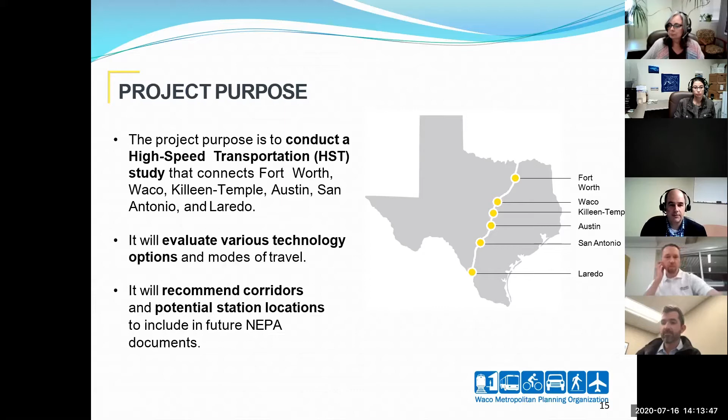Just as a reminder, this study was intended to begin where the Texas-Oklahoma passenger rail study left off. If you remember, that study looked at several different service options along a corridor roughly paralleling I-35 from Oklahoma City all the way down to Laredo and into northern Mexico. This study focused on just a handful of things. One was technology, adding Hyperloop as an option for consideration since that is new since the TOPRS study was completed. We also wanted to look at conceptual alignments and refine that a bit from what the TOPRS study looked at, and then look at a very high level at potential station locations within each of our MPO areas.

So on slide 16, one of the most important things that came out of this study was a determination that all 6 MPO areas are viable station locations for any potential high-speed transportation option. For us, that's particularly comforting because, as you can see from this slide, we are the smallest of the 6 MPO areas along the corridor.

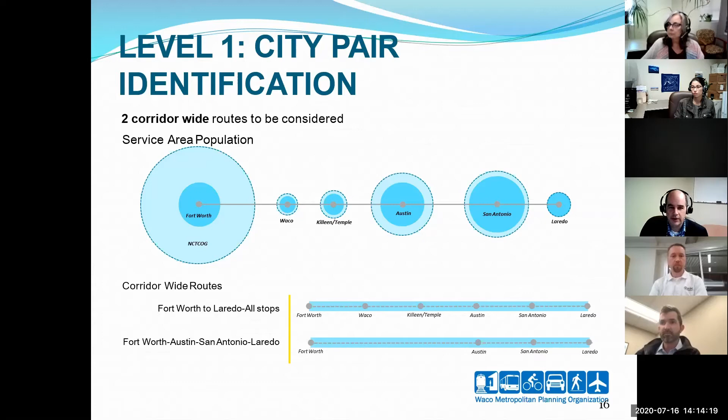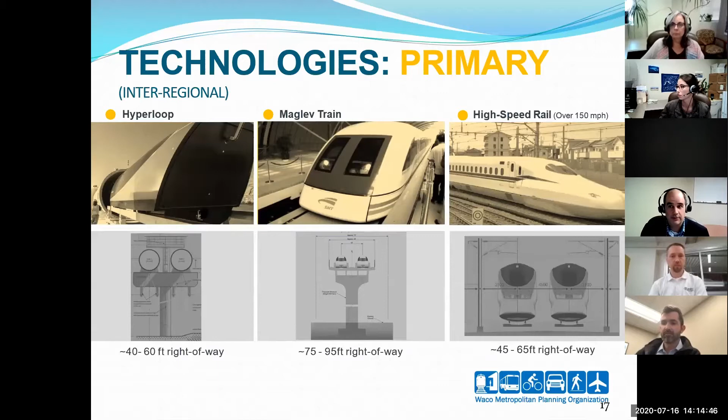When we get to slide 17, the consulting team really focused on 3 primary technologies for this corridor: Hyperloop, which I've just mentioned, maglev, and high-speed rail. I'll go over a little bit about what each of those entail and what some of the advantages and potential disadvantages are for each.

When we talk about high-speed rail, we're talking about a traditional steel wheel on steel rail train, but it's really trying to maximize the speed benefits of that technology. There are some significant limitations. 200 miles an hour is probably about the maximum, with a typical operating speed closer to 150 miles an hour. The big advantage is it's proven technology, in operation in countries all throughout the world, so we know very well what those engineering, operational, and construction costs are.

When we get to maglev, we're a little bit more futuristic. Maglev is short for magnetic levitation, usually over a center beam. You have magnets in both the train and the track, and the magnets within the track are turned on and off to propel the train down the track. The big advantage is that the train essentially floats on magnetic current, eliminating any drag or resistance from steel wheels, so you can go much faster than traditional high-speed rail—usually about 350 miles an hour topping out, with typical operating speeds around 250 miles an hour.

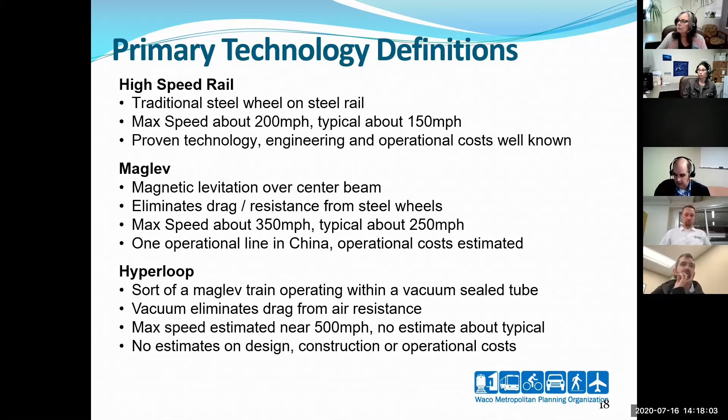Now, the consultants did look at 3 other infill options, just a very cursory review. These are probably more appropriate as a second phase to basically provide service to the areas in between the main stations—so something like service to Hillsboro, West, or Lorena, perhaps. But that's probably still maybe another decade or so beyond development of the primary corridor.

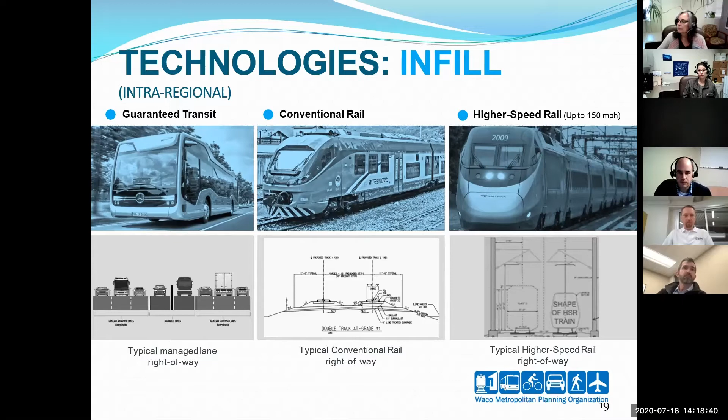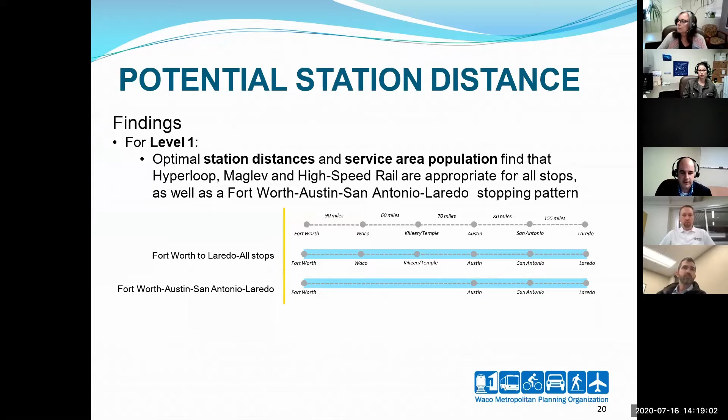So on slide 20, the main takeaway at this particular analysis is that not only is service to Waco viable, but all service options are also viable to all stations or all MPO areas. So that's another important recommendation out of this study.

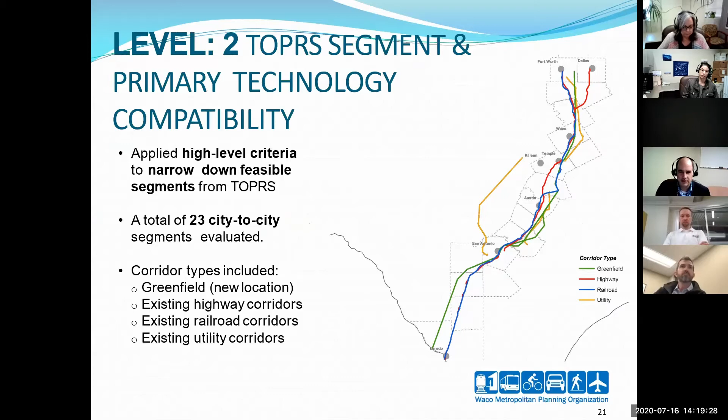So the next part was potential alignments, and this is still a very high-level conceptual overview, basically just trying to identify whether it was appropriate to follow existing corridors—highways, railroads, or utilities—or whether a greenfield alignment was going to be necessary. In general, when this was presented to you back in November, the feeling was that greenfield alignments or utility alignments were probably what we're going to have to follow for the most part for each of the different service options.

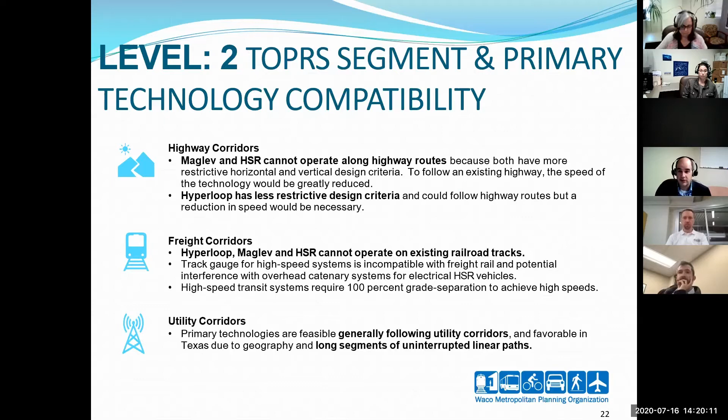That has changed, and the consulting team has made a change for the alignment between Temple and Fort Worth from, I believe, mostly a utility alignment to following Interstate 35. And we have some concerns about that, and we're going to cover what our concerns about that change are in just a second here.

We suspect the change was made to reduce potential right-of-way costs, but also to reduce the political capital necessary in a greenfield alignment scenario. So no surprise, because of the potential difference in travel speeds, the Hyperloop options came out as the highest scoring within the study, while maglev and high-speed rail scored significantly less.

Now the third part of this was to look at potential station locations. It's not going to identify a dot on the map, but basically looking at census tract areas, which can be fairly sizable. The consultants were looking at connectivity to other modes of transportation, what activity centers you might have within that area, any significant environmental constraints, and whether the land use within those areas was compatible with a high-speed operation.

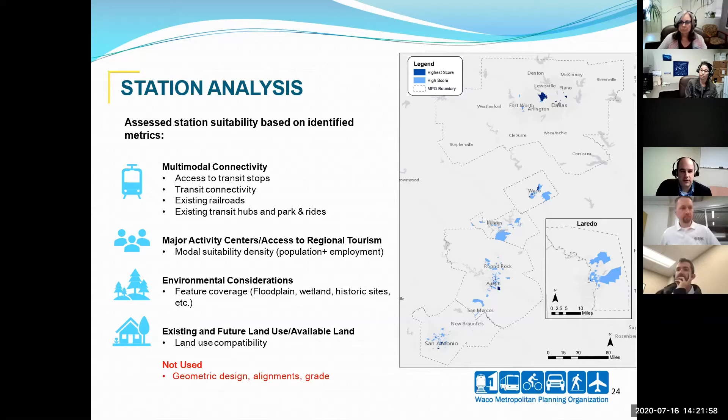When we go to the next slide, slide 25, the center map is the Waco area. You'll see that some of the high-scoring areas are actually out towards West Waco or the Hewitt-Woodway area, which I think would be extremely challenging to get a service line operating at 150 or 250 miles an hour into those particular areas.

But one of the other areas is the Belmead to Lacy Lakeview area, and specifically the Potts interchange area, which we've already identified through another corridor study of ours, the Business 77 corridor study, as a real opportunity for redevelopment in that area.

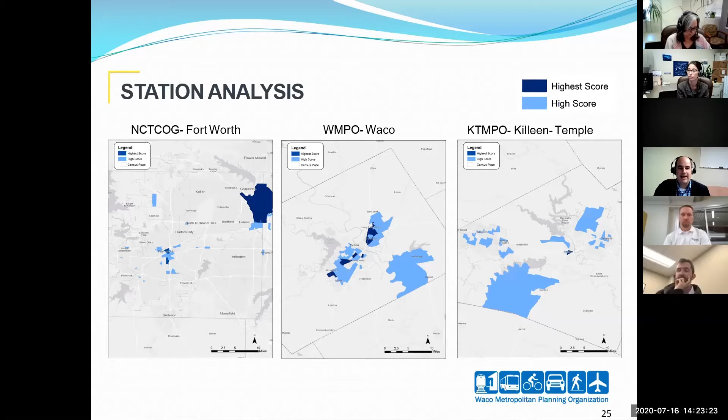The Bus Rapid Transit study has identified that as a potential station location for that service. So this may be a real opportunity for us to have a true intermodal connection and have plenty of right-of-way space to work with in that area. Of course, we're going to have a lot more study about whether that's actually feasible, and whether you can get a high-speed line into that area without wiping out half of Waco, which obviously we want to avoid.

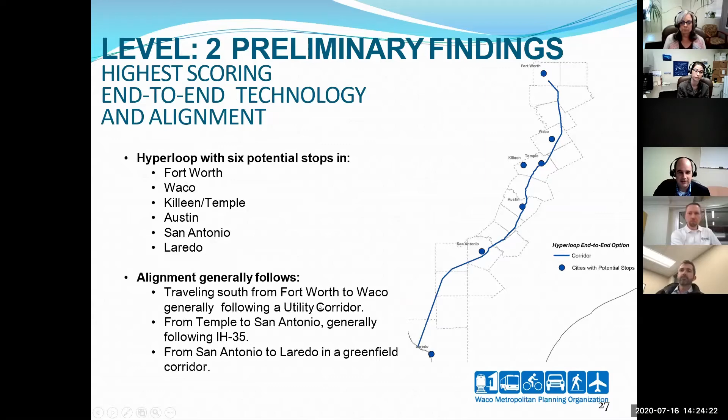And so slide 27, the findings that the consultants came up with is basically 6 stops, 1 in each MPO area, and Hyperloop is their recommended service option. As far as alignments are concerned, back in November it was Fort Worth to Waco following a utility corridor; that's now changed to Interstate 35.

So let's talk about some of our comments that we submitted to the consulting team. This is slide 28. Our first concern is that I-35 alignment. The suggestion was that Hyperloop could still follow that alignment and still travel at fairly robust speeds, whereas the other technologies would not be able to do that, most specifically maglev.

Since our understanding is that Hyperloop is essentially a maglev train in a tube, we're questioning whether that's really a valid assumption. Of course, we don't have a lot of details about Hyperloop design or its limitations. If it turns out that an I-35 alignment would require significantly reduced speeds, then our concern is that we're missing the potential benefits of that technology, which is the faster travel speeds. Or we're now having to look at a greenfield alignment, which would have a very significant right-of-way cost and political capital cost, to the point where it could perhaps change that technology recommendation.

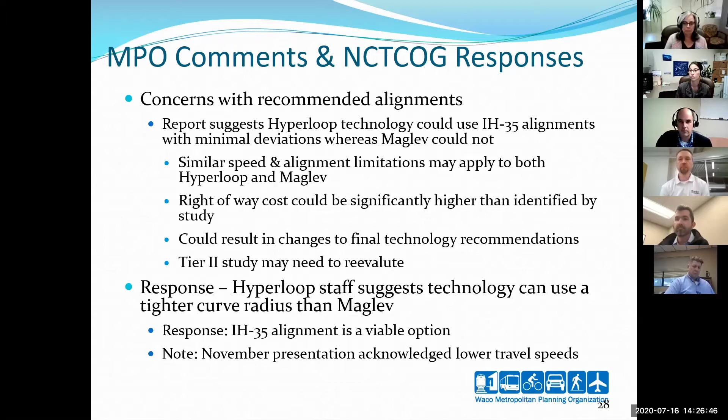The next concern we have was regarding their station analysis. We've already mentioned that their focus was on the land use question and whether things were compatible with a high-speed train station within particular census tracts. But some of what they identified as high scoring areas would be very challenging to bring a high-speed system in.

So we think this is another area where a lot more study is probably going to be necessary when we start looking at the Tier 2 study, which would be the next step.

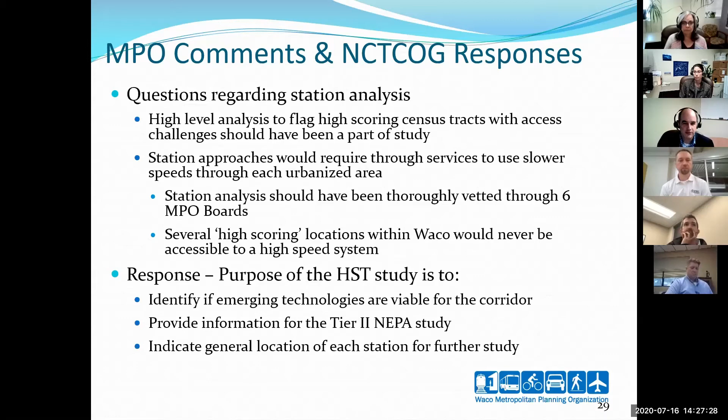So there's some policy and technical considerations we think we need to start having a conversation with the board on. The first is that, in our opinion, any technology above 150 miles an hour provides significant benefit to our region. It's a service option we don't currently have, and what we need to decide is what are we most comfortable with?

Are we more comfortable with a proven technology where we have known costs, which would be high-speed rail? Or are we willing to accept a little bit more risk with more cutting-edge technologies like maglev and Hyperloop? The risk there is that the costs may be significantly greater than perhaps what we were originally thinking, and the alignments may have to be a lot straighter, thus having a much higher taking component and requiring a much greater amount of political capital than we were thinking of initially.

We think Hyperloop does appear to be viable. There is a test track under development in Dubai, and the United Arab Emirates are putting in a considerable amount of their own resources to develop this. We think if it weren't viable, they probably wouldn't be looking at that kind of investment.

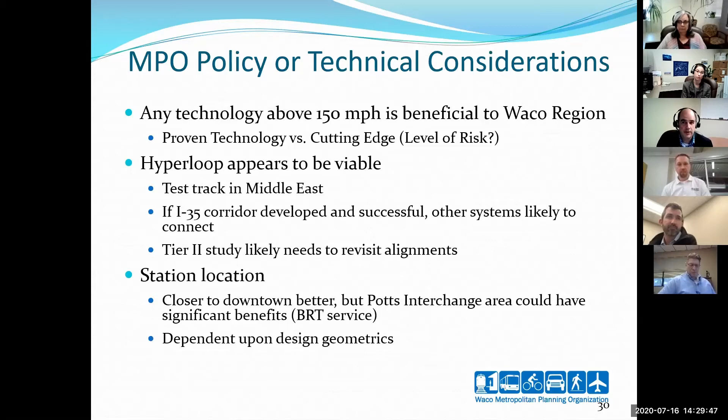So what's next? The study has been submitted by the Dallas-Fort Worth MPO, which is the North Central Texas Council of Governments. They have submitted this to the TxDOT Rail Division. The question now is, what is TxDOT's interest in continuing this study, and do they have the resources to conduct a Tier 2 environmental study?

My feeling is that they're probably waiting to see what happens with the Dallas to Houston high-speed rail line, which is making progress, but it's incremental progress, and probably is still another 4 to 6 years away from operation.

There may be private sector interest in a Hyperloop operation along I-35. The Hyperloop folks several years ago issued a report where the I-35 corridor was one of the top 20 corridors they were interested in, and it was for a number of reasons.

Market analysis should be fairly easy to construct, and there weren't a lot of environmental constraints. So this may be something where we just need to get the ball across a certain goal line, and then perhaps the private sector might be able to take this up from there.

Of course, we don't know how COVID has changed interest in this particular system. We know that right now there's not a lot of interest by the public to get onto planes, trains, buses. My guess is that once we get a handle on this disease and are able to protect ourselves against it, probably shortly thereafter, folks' memories will be short and we'll go back to some of these other transportation options. Maybe wishful thinking on my part. I'm hoping it isn't, but that's something we're going to have to track.

All right, can you hear me? Yes sir. All right, we'll start with 84. The contractor's working in the intersection, starting signal work today. I hope to have permanent signals up and activated by the end of the week. I should just have a little bit of intersection and frontage road work to wrap up. We hope to be done late this month, or worst case by end of August, and out of that Speegleville project.

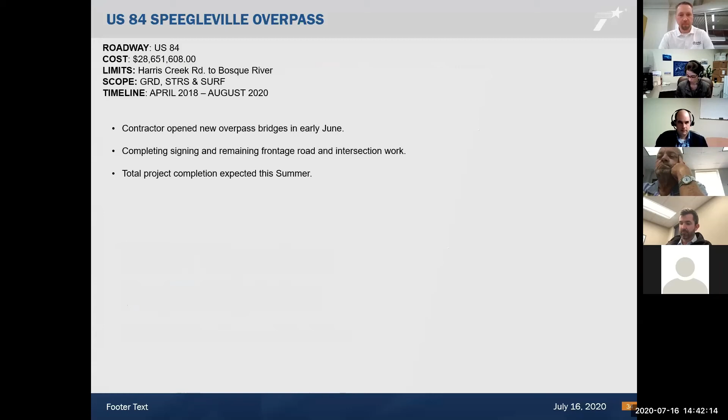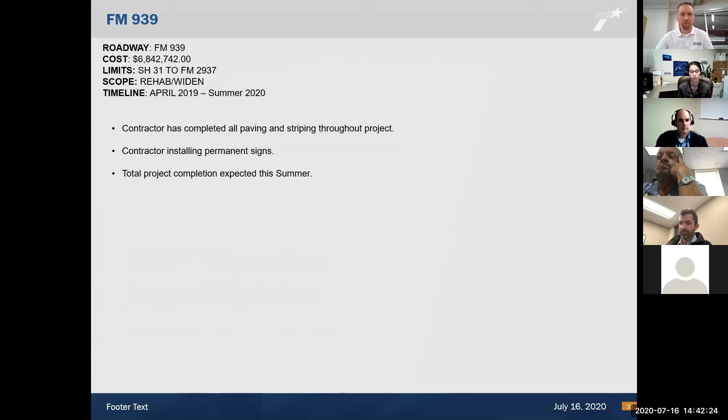939, again we're in the closeout stages, installing permanent signs, punch lists. Hope to have it wrapped up by the end of August as well. 938 at Tonk Creek, bridge is constructed, we are building the new roadway approaches on either end. Again, this is another one we hope to have wrapped up this month, August timeframe.

1637 phase 2, again another one in punch list phase, so we hope to be out of there by end of July or August timeframe as well. 1637 phase 3 is really starting to progress. Contractor is going to be starting paving on the north end of the project next week. We'll continue working in towards China Spring, and we hope to be done in the fall.

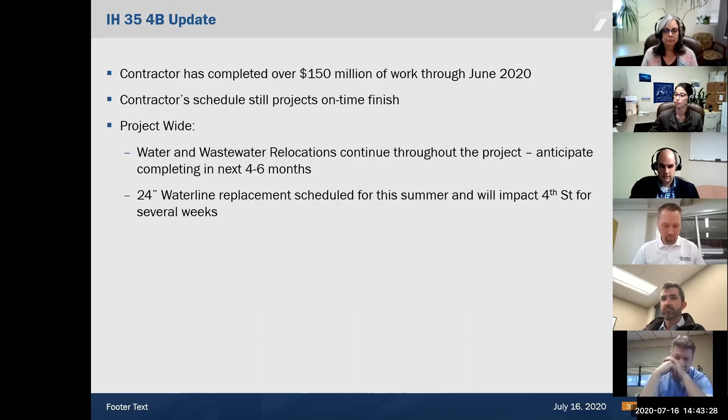So 35, we've completed just over $150 million worth of work through June. We're still projecting an on-time finish. Today, I'm actually going to do something a little different, so Chris, I'm going to take over.

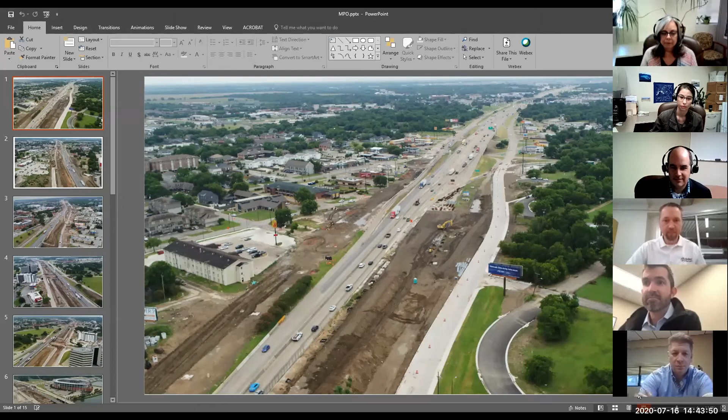We had a drone come fly the project in June. I'm just going to walk through progress and where we're going.

This first picture is the south end of the project. You can see the frontage road's complete. We're working the southbound main lanes. The northbound frontage road side, we should start paving hopefully the beginning of August, starting down around the 17th, 18th Street area and then working our way north.

You can see the new 4th, 5th Street bridges at the top of the picture. We've completed the beam setting there and hope to have that deck poured later in August. In the same stretch, you see where we've started the southbound main lane excavation and embankment work. Over on the northbound frontage road side, we're hopeful that in the August timeframe paving continues up towards 4th, 5th Street.

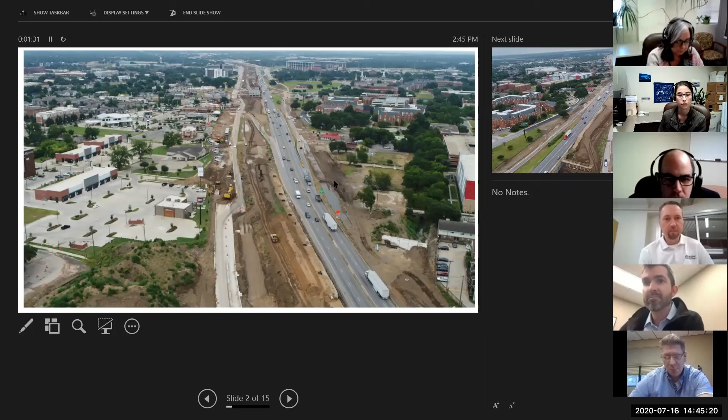This is from 4th, 5th Street, looking back to the south, an opposite view of what we just discussed. Again, you can see that one remaining section of the southbound frontage road to be completed. At the top of the picture is the new 11th, 12th Street overpass, which we hope to have poured in the August timeframe as well. On the left side of your screen, you can see the newly completed and newly opened Dutton Avenue.

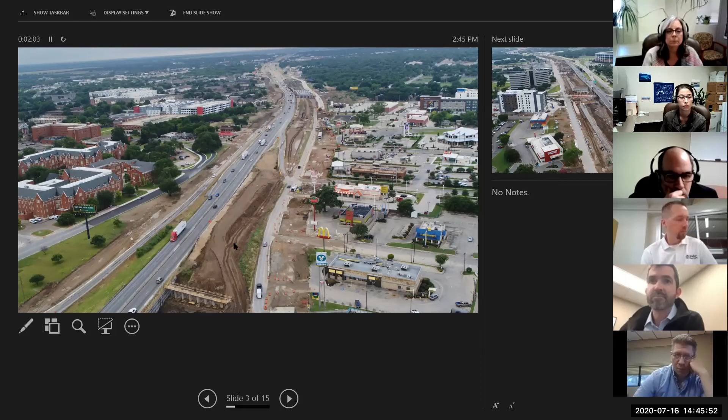This next picture is from 4th, 5th Street looking to the north. You can see the retaining wall work that started for the southbound main lanes. This bridge structure is the University Park structure, and there are now beams on that structure as well. We hope to have that bridge deck poured in August along with 4th, 5th and 11th, 12th. On the right side of your screen, you can see the little section of northbound frontage road and the right turn lane onto University Parks. That's another section we hope to have paved and opened in August, which should help the operation of that intersection.

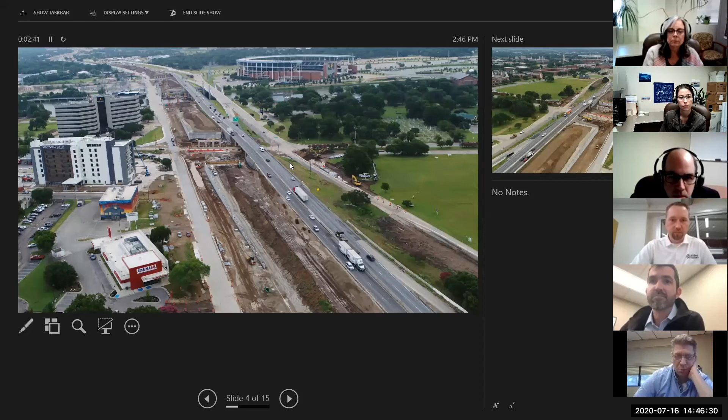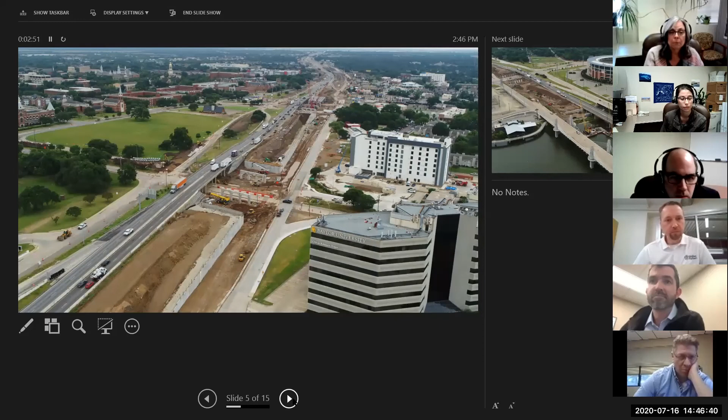This is again between University Parks and the Brazos River, looking back to the south. Just another view where you can really see the retaining wall work that's going on and continues to progress in that area.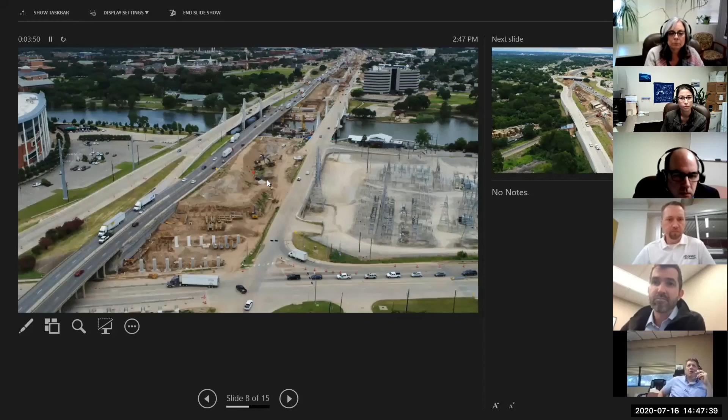Now this is from MLK looking to the north. This closest bridge structure is actually our bridge over the railroad tracks, which we're having to cut and pick in sections to work around the train schedule. Since this picture was taken, the vast majority of that bridge has now been removed, with the two spans on the north end and south end left to come out. You can see to the north where the contractor started actually placing the new pavement for the new southbound main lanes of 35 coming under the 4th Street Bridge.

This is from on top of the 4th Street Bridge. At the bottom of the picture, you can see the turnaround structure that was completed with this project. Since this picture was taken, the contractor has done some dirt work to tie in the new MLK exit ramp. They've got bond breaker on the ground and will be placing concrete pavement for the new main lanes, looks like later this week and into next week.

And again, this black hot mix section, this is what I was just referencing, that'll be paved this week. And again, it's the new I-35 main lanes through this area.

Looking to the north, you can see this is what used to be the 77 interchange. It's changed quite a bit since the start of this project. All that's left is the northbound bridge. You can see the new southbound frontage road coming through. On the right side of the page, this frontage road section has been graded out.

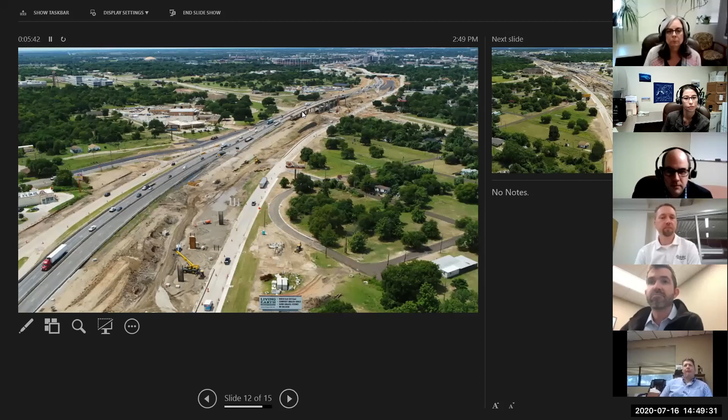This is from roughly the 84 intersection looking back to the south, another view of what was the 77 interchange. You can see these columns down at the bottom of the page. That is for the new 77 braided ramp exit.

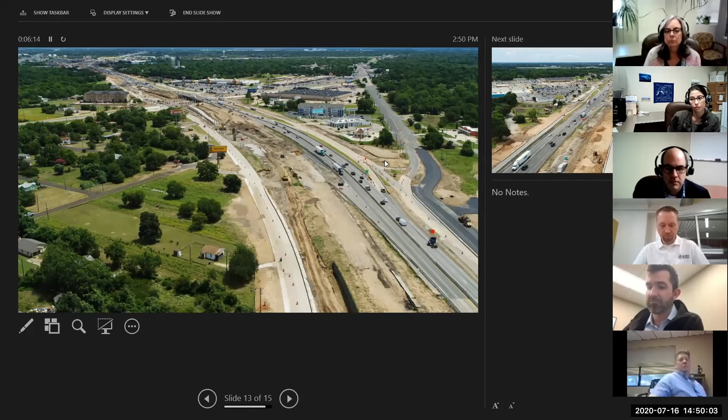This new concrete pavement has gone down on the frontage road. This next picture will show a better view, but this is looking to the north at 84. On the right side of the page, you can see the new northbound frontage road that has hot mix on the ground and the tie into Bellmead Drive. That'll be paved in August as well, along with this section just north of Bellmead Drive up to 84.

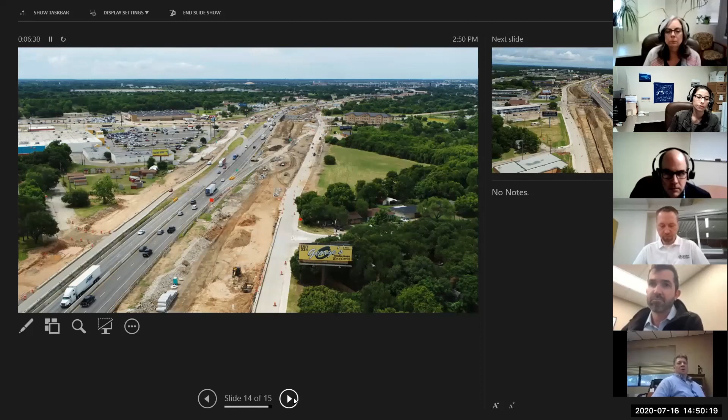This is from Behrens looking back towards US 84. Again, you can see all the southbound main lane work going on there, the completed southbound frontage road work, along with the northbound frontage road dirt work.

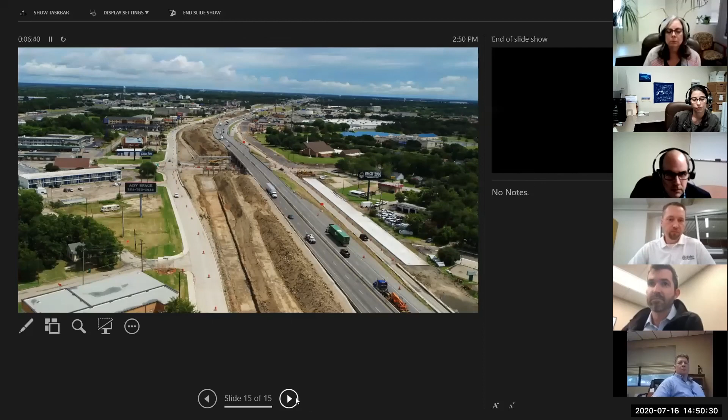Last picture here, this is the Behrens interchange. The northbound frontage road intersection was actually paved earlier this week. Contractor will be coming back after they pave the main lanes to pave from Behrens up to about the Popeyes restaurant towards 340. You can see the southbound main lane work going on here as well, and retaining wall work has actually started in this area since the picture was taken.

With that, that's the last picture I have. As you can see, a common theme is a lot of concrete pavement coming up along the northbound frontage road and southbound main lanes, along with a lot of bridge work. So I'll open it up to any questions if there are any.

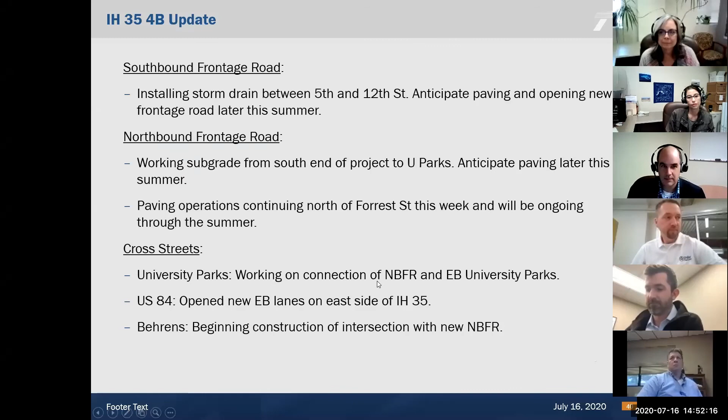So there is no meeting scheduled for August. Our next meeting will be Thursday, September 17th. We are anticipating that all of our remaining policy board meetings through December are probably going to be virtual. Of course, that's dependent on the governor's office continuing their disaster declarations, that is what allows us to meet virtually as opposed to in person. We're anticipating that that's probably going to continue for some time.

For that agenda, we do have some proposed designation changes to the National Highway System, and we'll be going over what the National Highway System is, since that's not something we deal with very frequently. This is actually the first time there are any proposed changes since it was first adopted back in 1991.

We also want to start a conversation regarding TxDOT's Vision Zero. The Transportation Commission has adopted an official goal of eliminating traffic fatalities by the year 2050. So we want to begin that conversation of what that looks like for our region and an assessment of fatal crashes within our county, and we can go all the way back to 2010 on that.